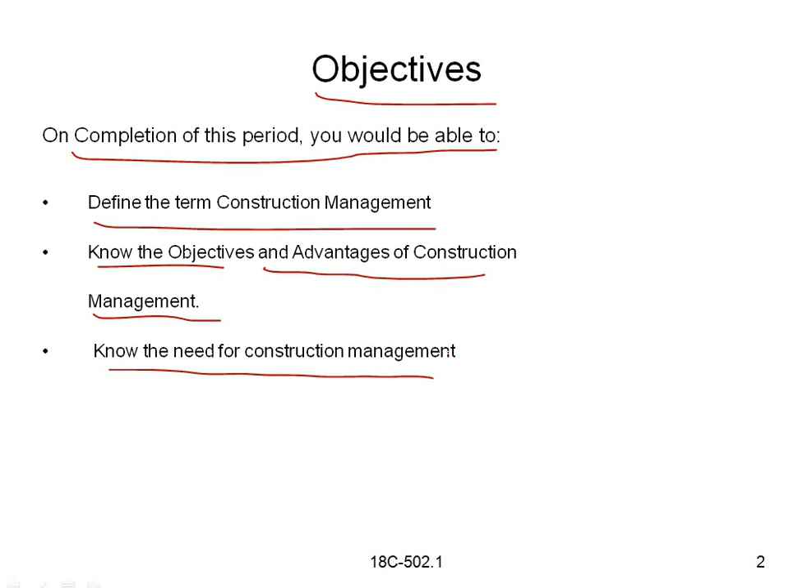Actually, why is construction management necessary? We will know the factors involved in construction management - what are the useful things which are involved in construction management. Let us see now.

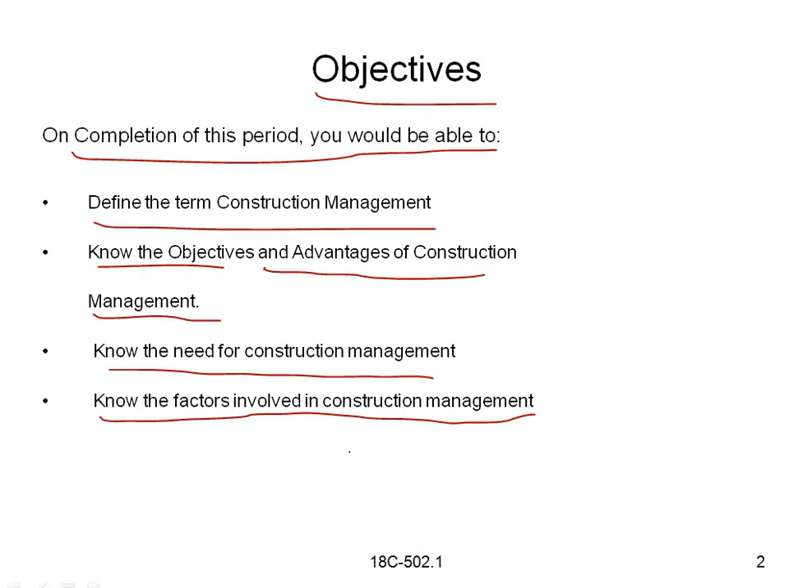First of all, this is the introduction to construction management. In order to develop the national economic conditions, half or more than half of the expenditure is accounted for by construction activities.

Here you can observe one condition, that is national economic conditions. What are the national economic conditions? This refers to what the government is spending on companies, food products, developments or jobs - everything. National economic conditions depend on agriculture and the constructions.

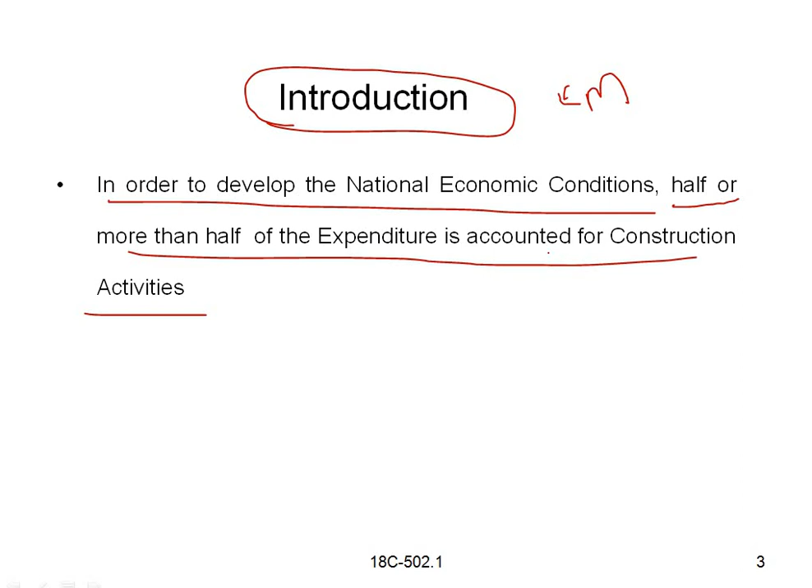We can observe day by day the construction activities are improving. The construction process is developing, encouraging its stages and improving its qualities in construction. You can see the constructions are moving very fast now with teamwork.

You can observe the construction industry must be backed by the latest management concepts to achieve good results. Before 2000, you can observe construction was very slow because we didn't have proper equipment or proper skilled labor.

Moreover, construction has developed now very highly, and we have so many types of equipment in construction. We have good skilled laborers and good skilled engineers, good construction management teams, and very good quality constructions going on.

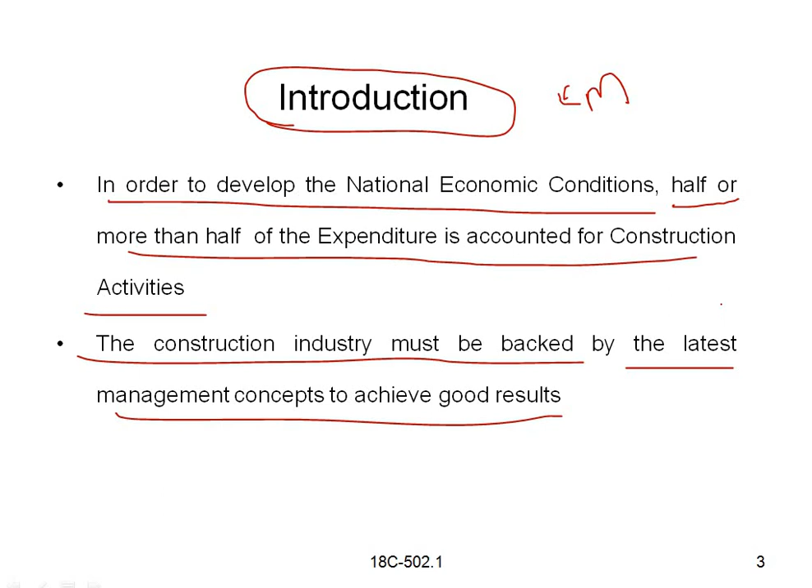The first priority is safety. The safety of every member in construction management is the first priority. From the olden days, construction has developed, and in daily routine life, construction activities are learning something new constantly.

Any construction activity demands management for speedy construction. Nowadays we need very speedy construction works, because slow works will not work out, and we will lose time, lose money, and lose materials on the site due to wastage. Speedy construction works will produce huge quantity and good results, whereas slow constructions will not meet demand even if quality is there.

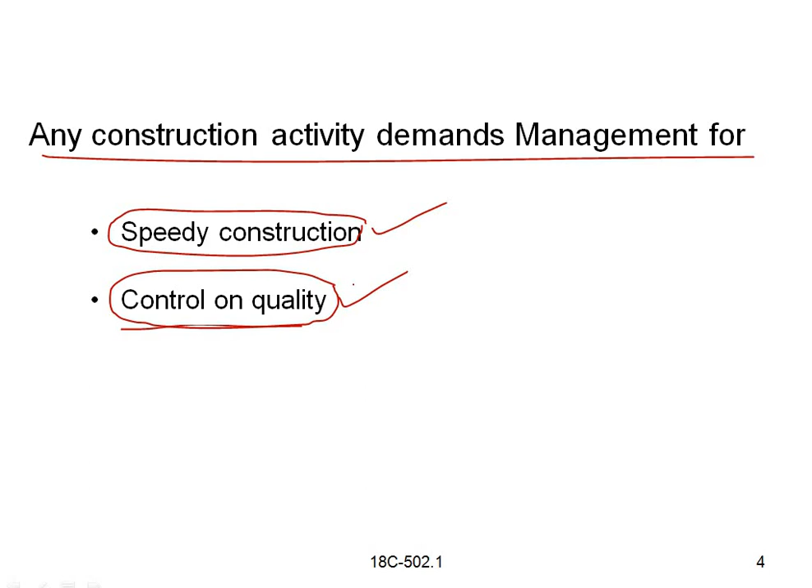The next one is control on quality. Whatever we are doing in speedy construction, we have to compulsorily maintain quality. If quality is not there in any company or product, the company's name will suffer, because quality is the first priority in construction. Because of quality, the life of the structure increases. If you compromise on quality, the life of the structure decreases, and the company's name also decreases. So whether the quality is good, the management will also be in good condition.

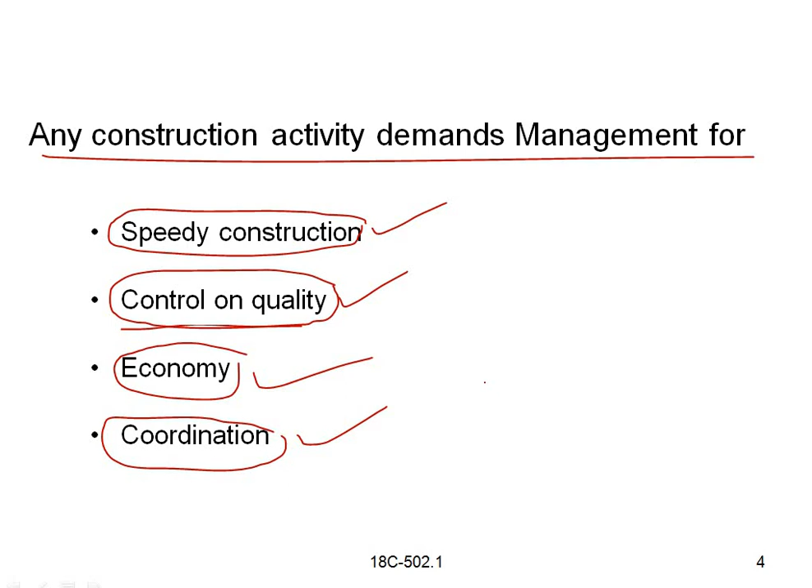The next is coordination. What do you mean by coordination? This coordination depends upon the management systems and construction works. It depends upon construction activities, whether concrete works, steel works, brickwork, material work, bar bending schedules, or anything else. That depends upon the management of a team.

It is creative - this creative comes from the management team - and innovative means something new. Day by day constructions are going on speedily. Why are these constructions going on speedily with good quality? Because something innovative was done in construction. That is the innovative force trying to secure maximum returns by optimum utilization. The maximum return means whatever we keep in the company for growth, that will return in good quantity or good quality. That is the optimum utilization of resources within the stipulated time at optimum cost.

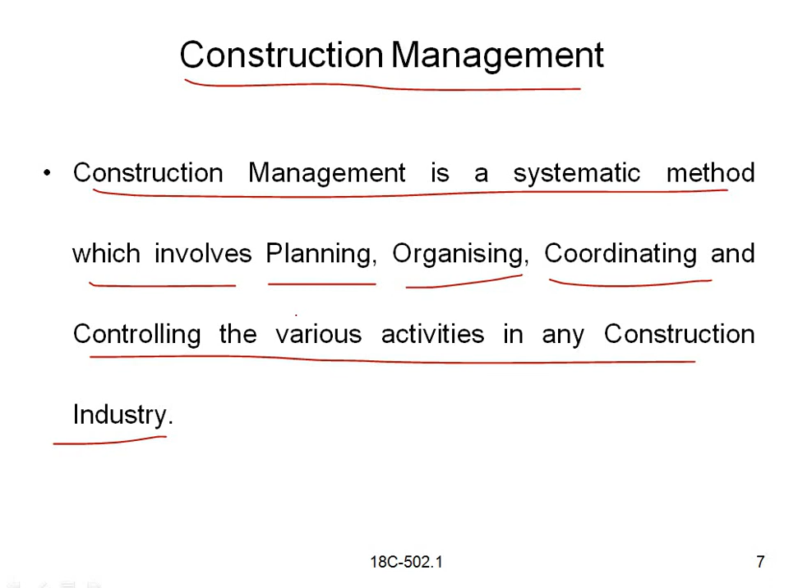All these have to be controlled by the site in-charge - for example, a site engineer, assistant executive engineer, or assistant engineer. All this is done through construction management, which is called planning, organizing, coordinating, and controlling. That is regarding the construction management definition.

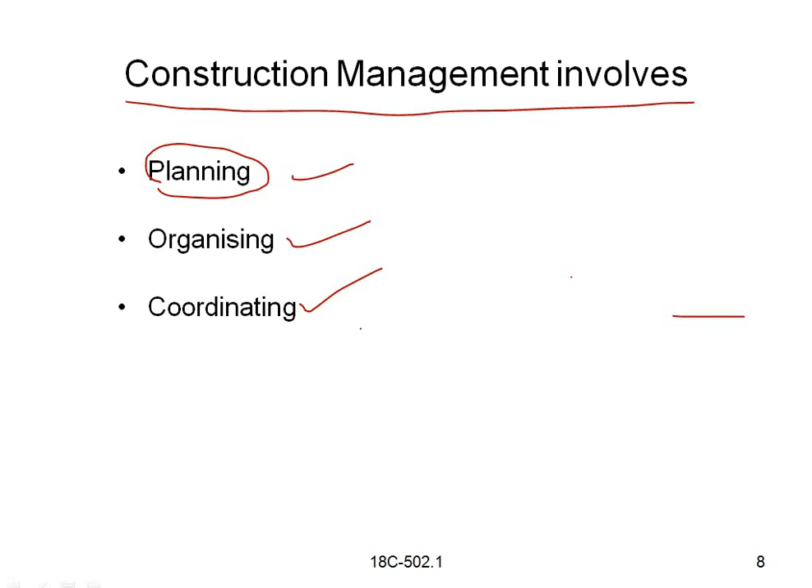The next one is what construction management involves - what are the things involved in construction management. Construction management involves planning, organizing, coordinating, and controlling.

The objectives of construction management are to complete the work within the budget and stipulated time. So within the budget means for a construction company or any project work, sufficient budget will be allotted, and from that budget amount only the work should be completed.

Not only completing within the budget, but also within the stipulated time the project should be completed. If the time is not completed within the stipulated period, the project will be very slow.

Another objective is to evolve a suitable method for high quality workmanship. High quality workmanship means, for example, skilled labor - skilled persons who know the construction works, so they are called high quality workmanship. If high quality workmanship is present in the construction management, the team work will be done very fast and a good quality of work will result.

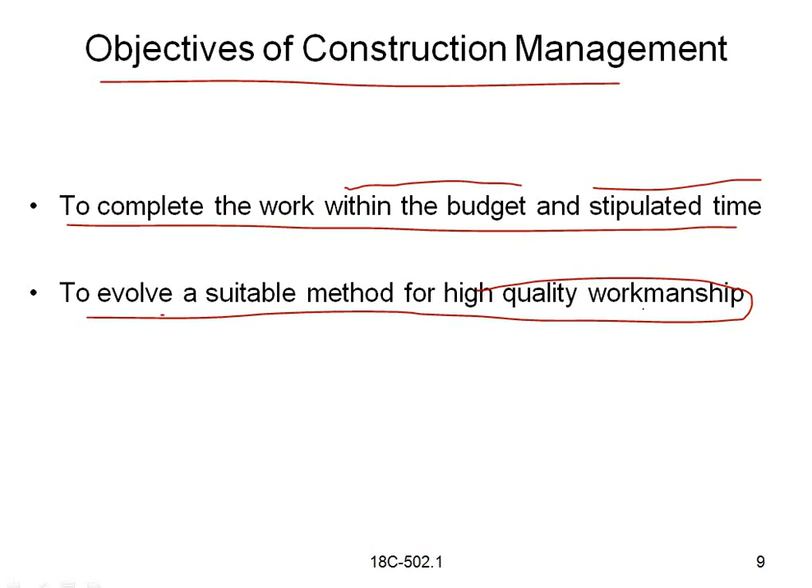The next objective is to motivate the people for optimum performance. We have to encourage the people working in site conditions, like engineers, supervisors, or labor. We have to motivate them regarding the works, the quality, and how to conduct themselves at the construction site, looking after their safety performance. By motivating the people, the construction management will achieve very good quality work and performance.

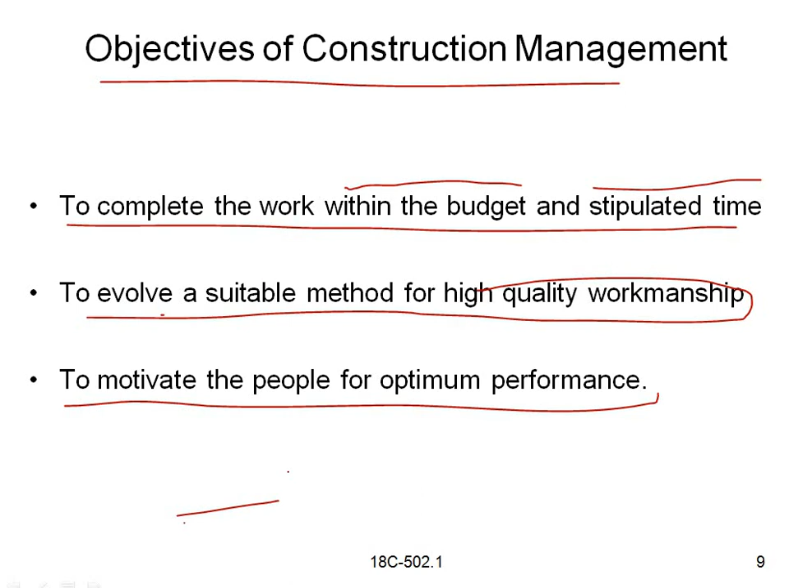The next objective is to create team spirit in the organization. A group of team members, like engineers, supervisors, project managers, and general managers who are present at the site, will get team spirit in the organization by maintaining company standards and achievements. If team spirit in the organization is there, the work will move very fast with good quality.

Next, to take sound decisions even at the lowest management level. In construction companies, some higher departments will be there and lower departments will be there. For quality or steel works, we have to take decisions from them also, because decisions taken from the lowest management level are also useful for company growth. Without taking decisions from the lowest management level, like site supervisors or engineers, the construction management will not develop.

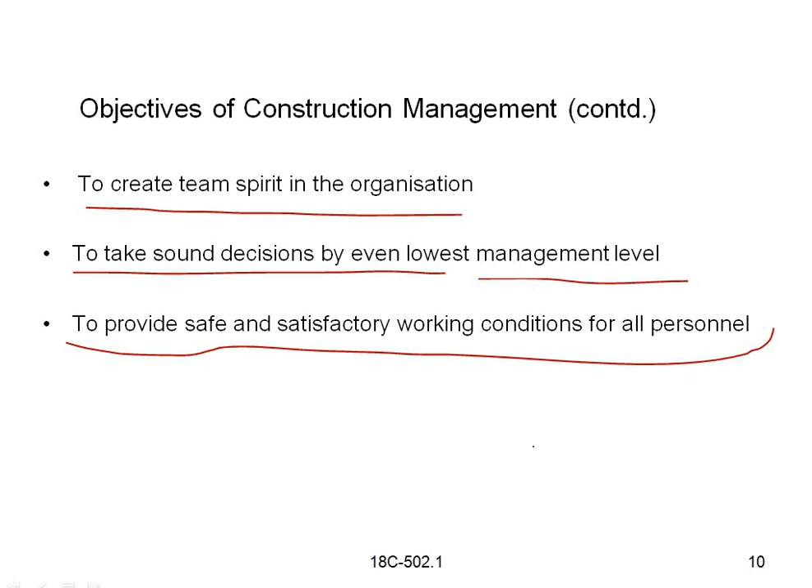The next topic is advantages of construction management. What are the advantages generally we will have? One advantage is that it helps as a key for completing the given task. If a construction management team is there, it will be a key for completing the given task - for example, completion of the first slab within a week or within days. With the help of the construction management team, we will complete the given task.

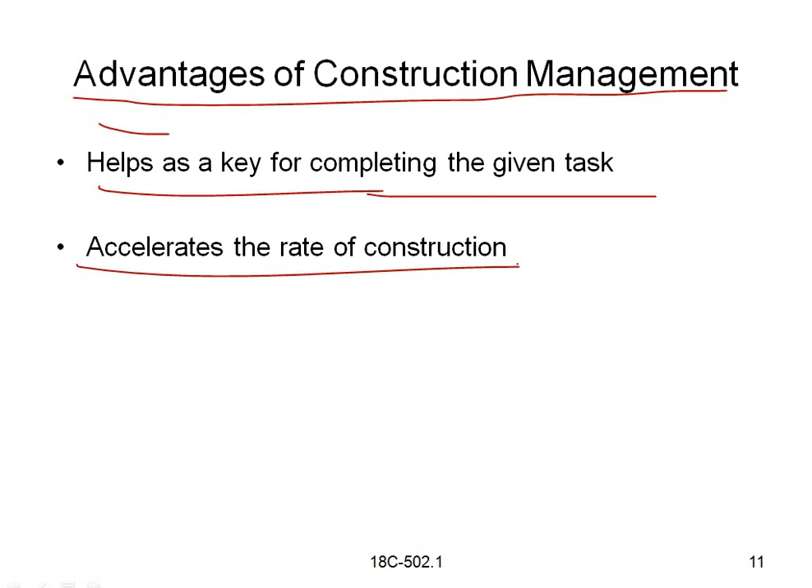The next advantage is it accelerates the rate of construction, meaning it controls the rate of construction works within the time. After the completion of the project time duration, the rate will increase and materials also will not come in time, creating huge quantity and time wastage. When the construction management is in good condition, the cost or construction of work will be completed within the time, and so it accelerates the construction.

Accelerate means it controls the rate of construction, and the next point motivates people to effective utilization of resources. The resources are materials or other works like concrete work, steel work, plumbing work, electrical work. These are all called resources, and they will be completed at the construction site within the project time. That is regarding construction management advantages.

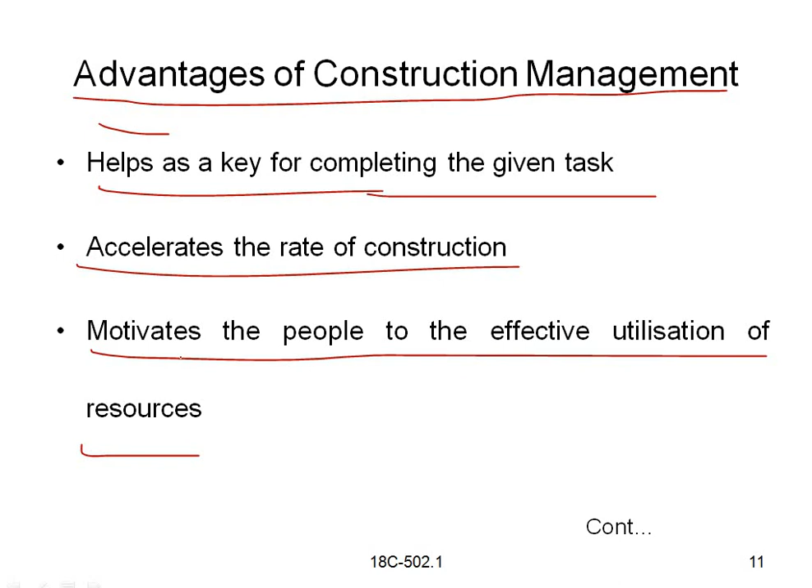The next advantage is it helps control quality and workmanship. Controlling quality and workmanship is very important for a company. At the site we have to look after quality works also, such as cement testing, brick testing, steel testing, aggregate testing, soil testing, and cube testing. These come under quality control. Testing the materials used in construction is very important, because failure or lack of quality materials causes structural failure.

Workmanship is nothing but the fast and speedy work of skilled labor or skilled engineers, done by company members or engineers. Workmanship is very important for quality, and it makes an activity more economical, such as bar bending schedule work, formwork, or concrete work for a slab.

So what does efficient management do? Our question is, what is efficient management? An efficient management brings human and material resources like machines, materials and money together and coordinates among various activities. Materials are things like cement, sand, aggregates. Machines include earthwork excavators, dozers, bar bending schedule equipment, motor windings — these all come under machines, and money together coordinates among the various activities.

Money is the first thing to control the activities — without efficient money we cannot do construction site works. That's why proper planning, organizing and controlling should be there.

What are the resources required for construction management? Some examples: first is men. Men means we have two types of persons — skilled and unskilled. Skilled persons are masons, who do brickwork, they are called skilled. Unskilled labor are the daily wage workers — they only know earthwork excavation, cleaning of soil, and mixing of cement materials. So they are unskilled labor.

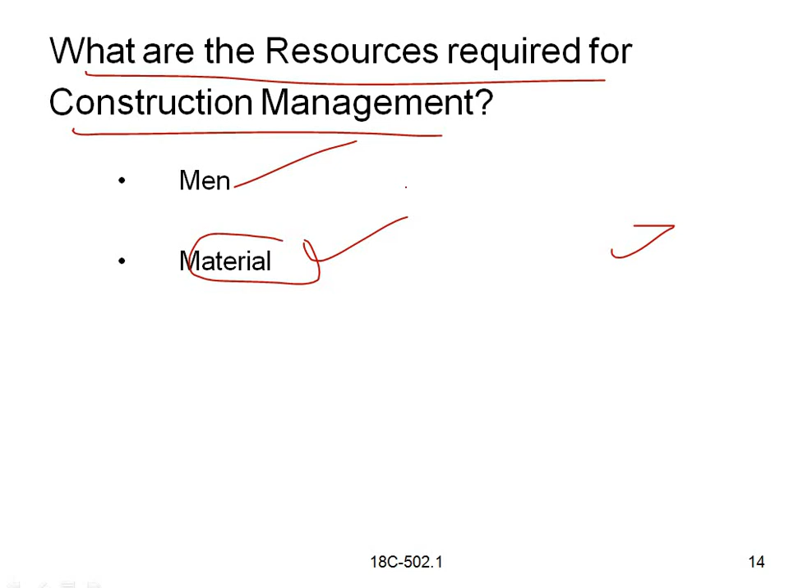The next resource is material, which is very very important. At the site we have to get material first of all. For construction of houses also, material is very important, so we have to consider good materials nowadays.

The next one is machinery. These machineries include so many things: earthwork excavator, dozer, bulldozer — all these should be controlled. That's why machinery is very very important.

The next thing is money. We have to use money in construction very carefully, because whatever materials, men or machinery we are purchasing, everything should be handed over by the concerned person. That is regarding the resources required for construction management.

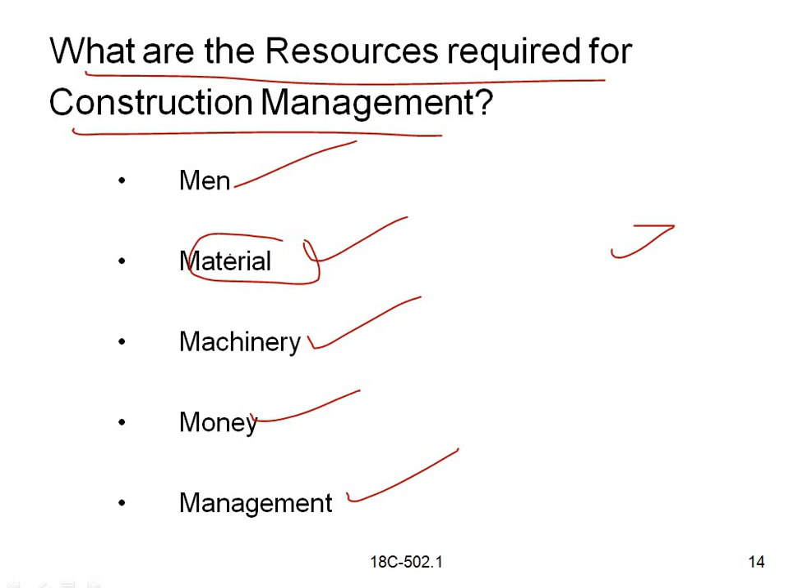The next one is management. Whatever these four things are — men, material, machinery, money — these will form a management team. These are the resources required for construction management.

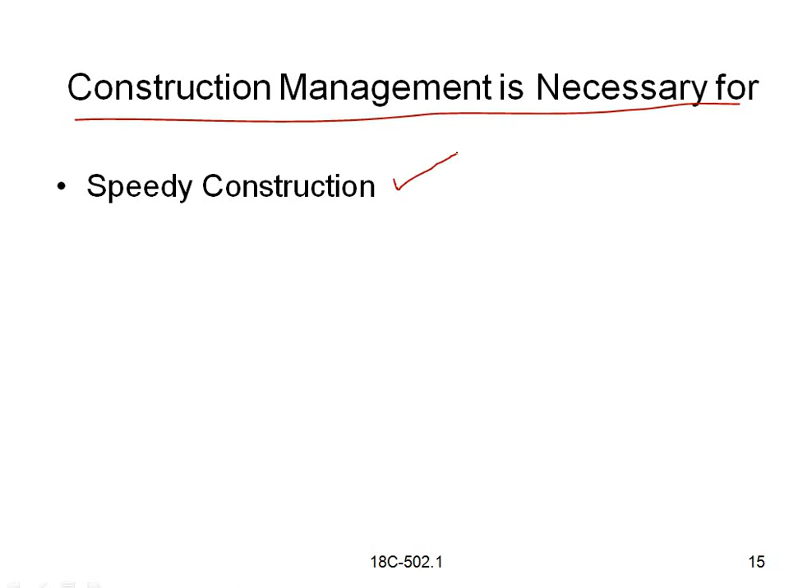So how much within the time we are improving, it will be there in the optimum utilization of time.

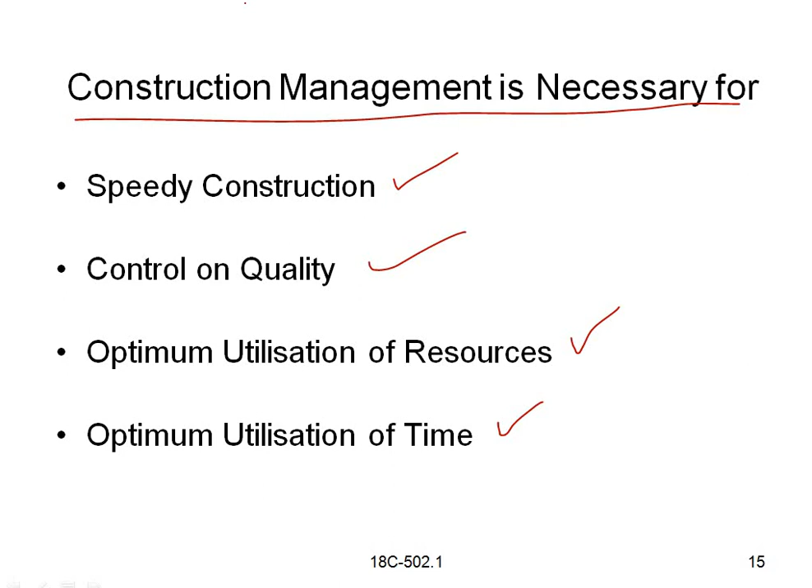So the next is the need for construction management. What is the need for construction management? It is the ability to estimate the required manpower, material, machinery and finance.

So in construction management, it will be the ability to estimate the required manpower. This manpower is also called labor, and material, machinery and finance. Materials should be brought from the quarries, and the machineries also will be coming on time. So this will be estimating the required manpower, material, machinery and finance.

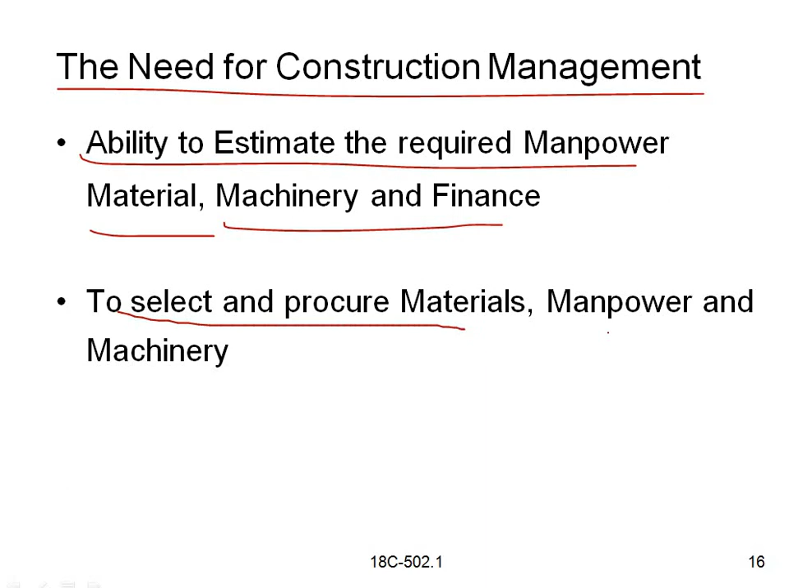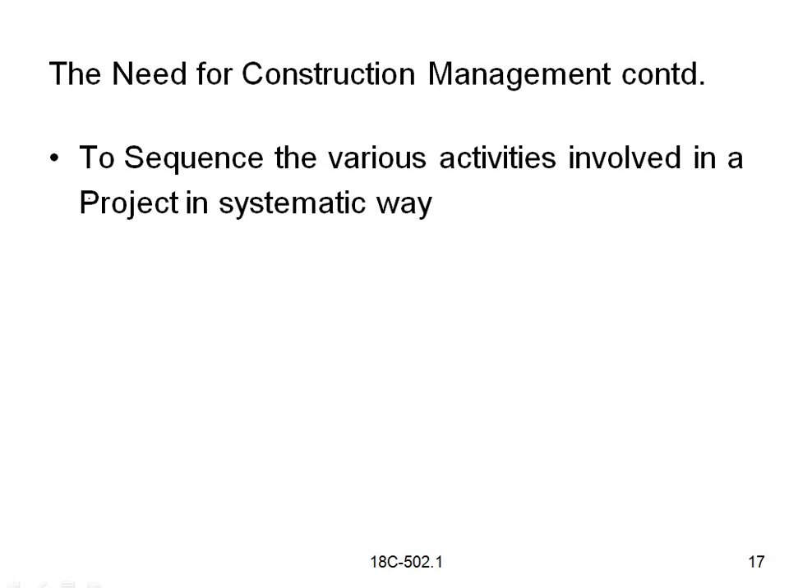To select and procure materials, manpower and machinery, to have proper coordination among the various activities, and to sequence the various activities involved in a project in a systematic way. So construction management will be done systematically, to complete the work within the optimum time and optimum cost.

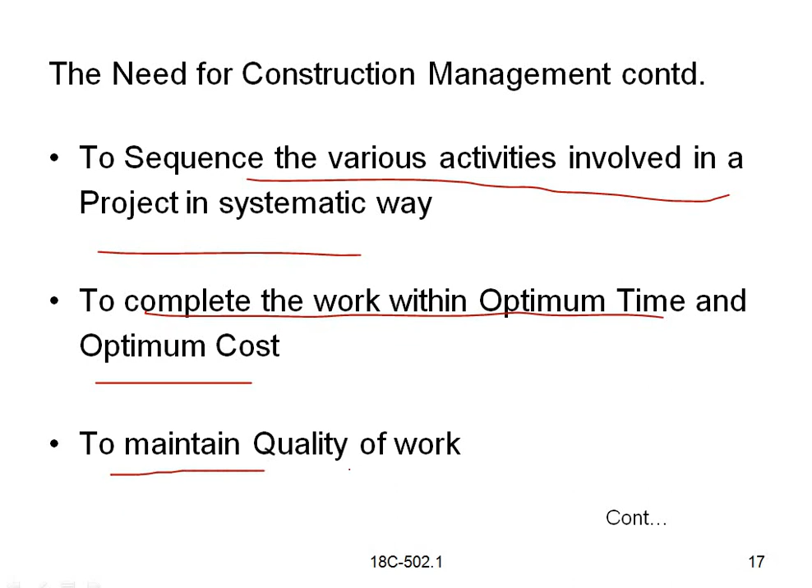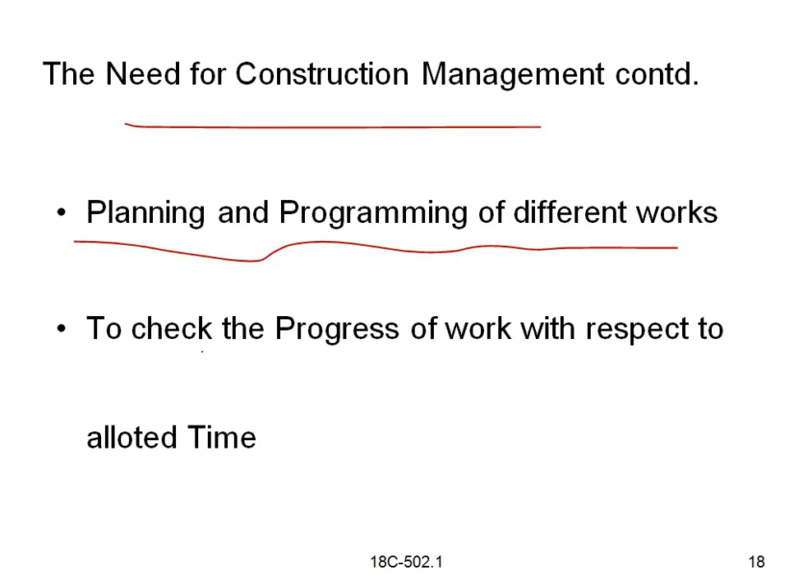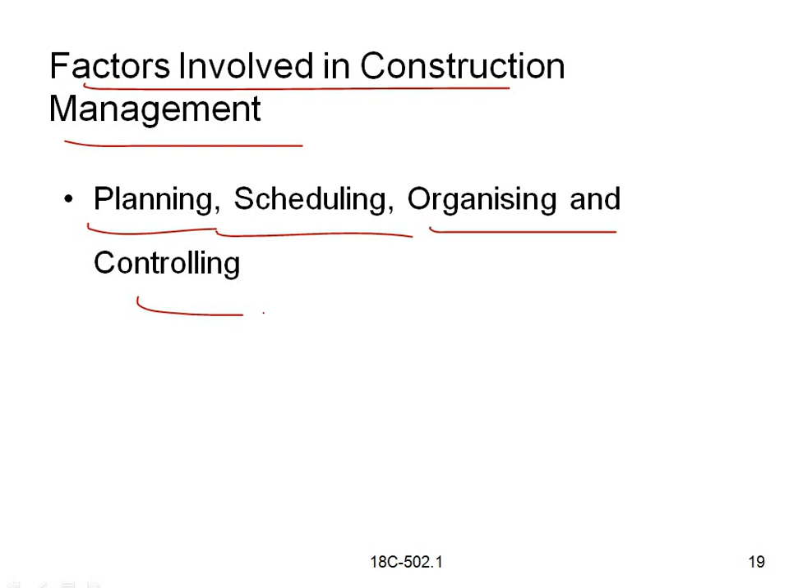What are the factors involved in construction management? This is also very important. The first one is planning, scheduling, organizing and controlling. These are the four factors involved in construction management.

Next is selection of proper materials, its cost including lead charges. For any construction site, we first have to get the proper materials - cement, sand, steel, aggregates, everything - and ask about the cost charges, that is called lead charges. So for the proper construction work site selection, the materials should also be selected correctly.

And magnitude of manpower and equipment. The manpower and equipment should be sufficient for large construction projects. If we don't have enough manpower or equipment, the construction work will be done very slowly and the work will be pending.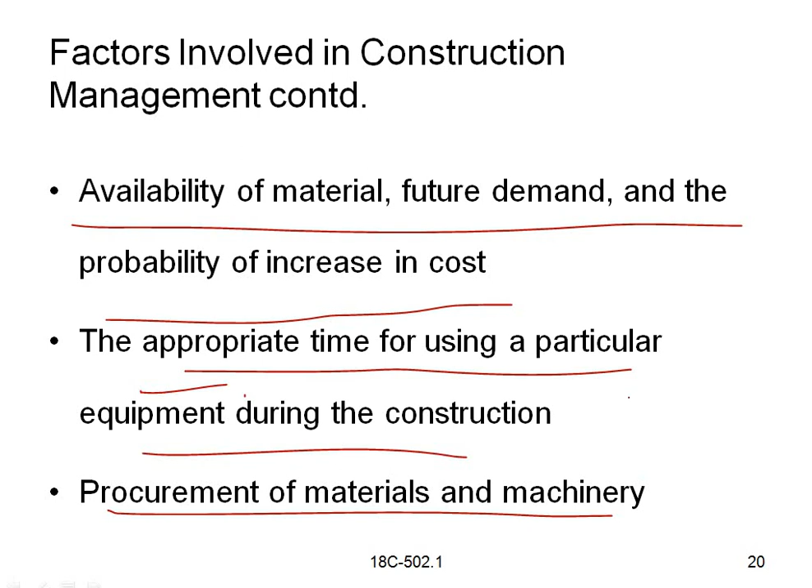The appropriate time for using a particular equipment during construction. At the time of construction, we have to change the different types of equipment depending on the type of work. So procurement of materials and machinery - we have to keep track of what materials and machineries are required in the construction projects.

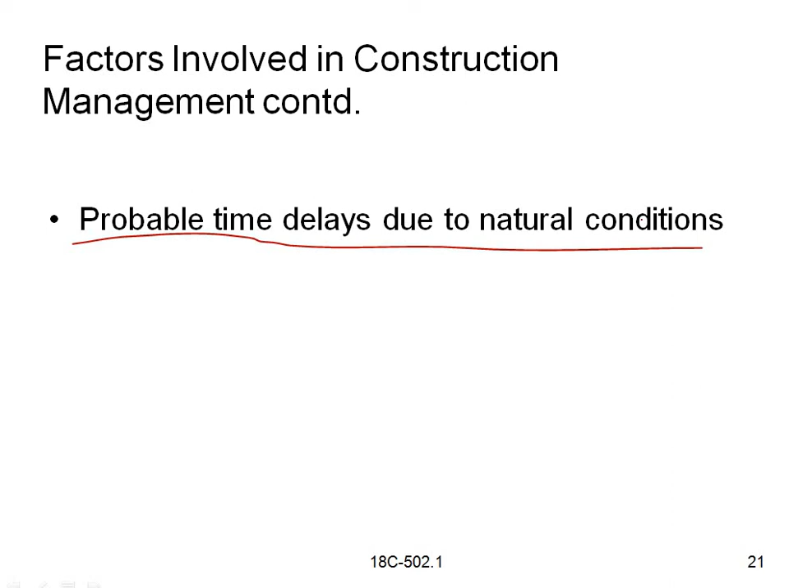And next is probable time delays due to natural conditions. If the work is very delayed, or any work is going very fast, we call it probable time delays, which will be due to natural conditions like weather not being favorable, or other purposes.

And skills required to finish the task. Whatever the total problems included in construction management, we need the skills for finishing the task.

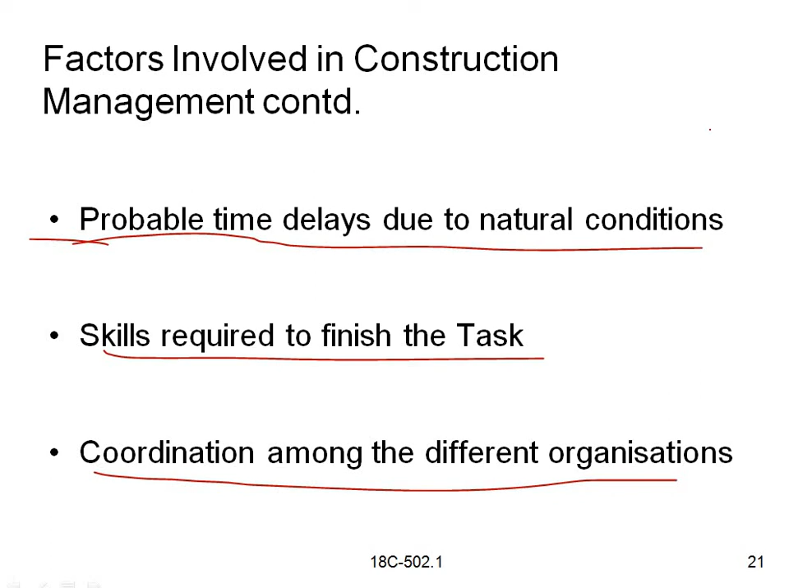And coordination among the different organizations. With the help of other departments, we should have good communication and good sharing of knowledge. That is useful for developing construction management.

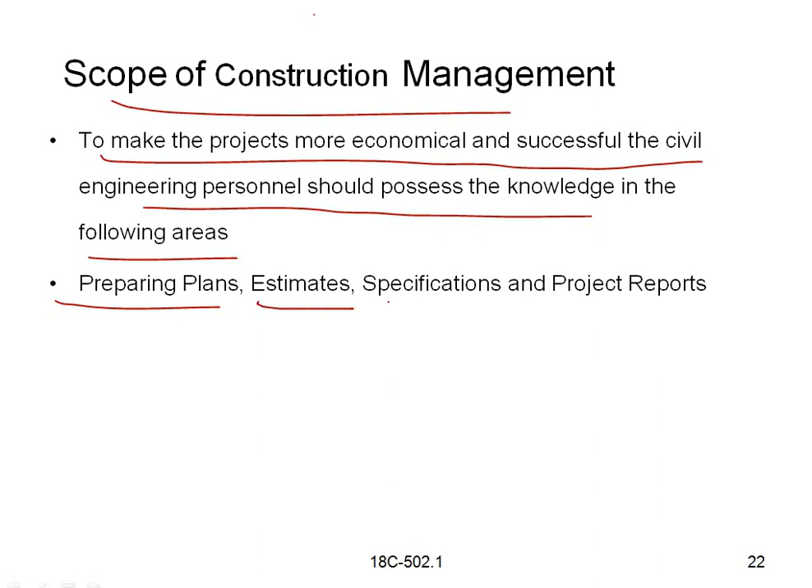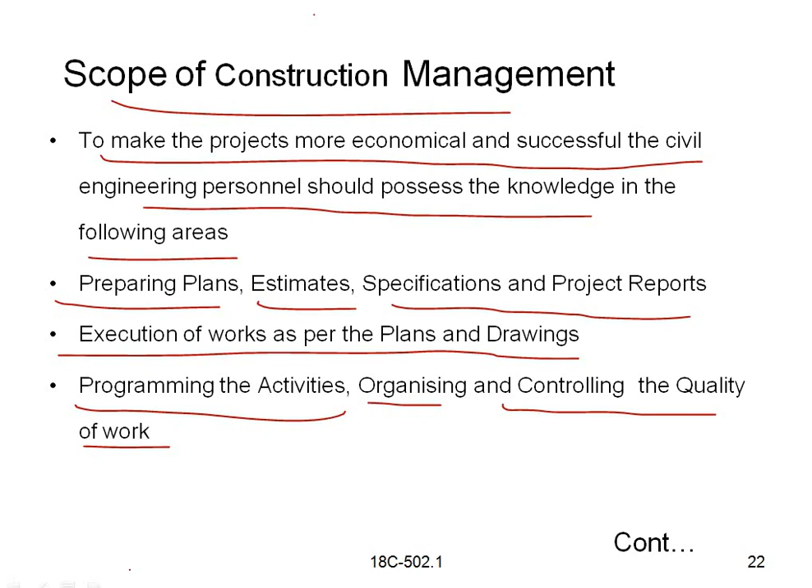Scope of construction management: to make the projects more economical and successful, the civil engineering personnel should possess knowledge in the following areas - preparing plans, estimates, specifications and project reports, execution of works as per the plans and drawings, and programming the activities, organizing and controlling the quality of work. So these all will be the scope of construction management.

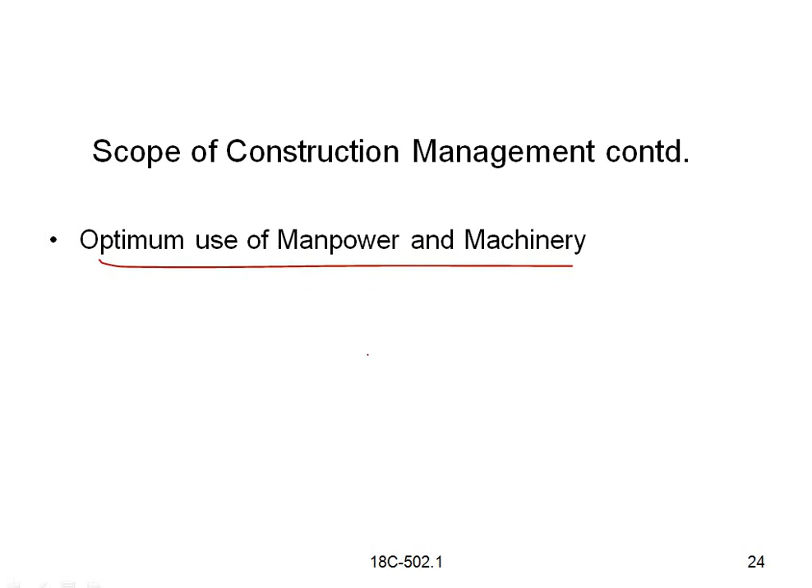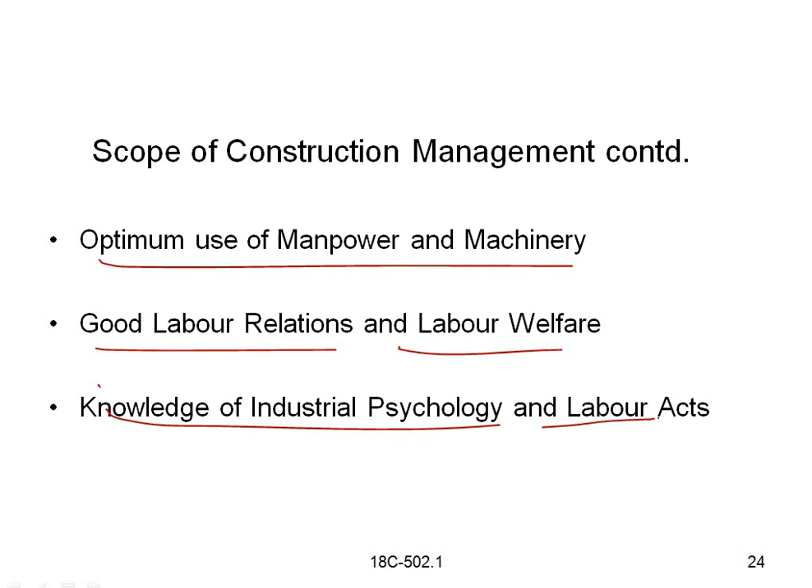And this is regarding optimum use of manpower and machinery, good labor relations and labor welfare, which should be maintained with the labor, and knowledge of industrial psychology and labor acts. So everything should be learned from construction management.

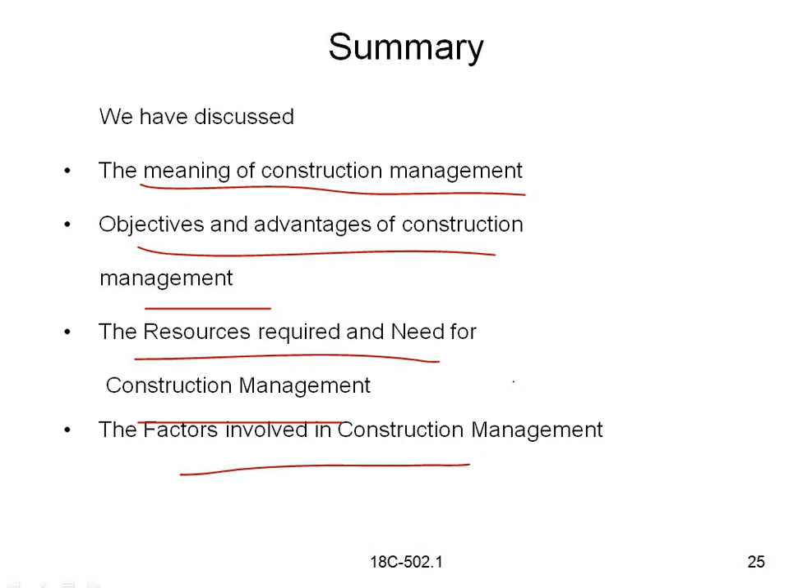So finally we have discussed today the meaning of construction management, objectives and advantages of construction management, the resources required and need for construction management. This is our summary and the factors involved in construction management. So this is our first management tools topic.